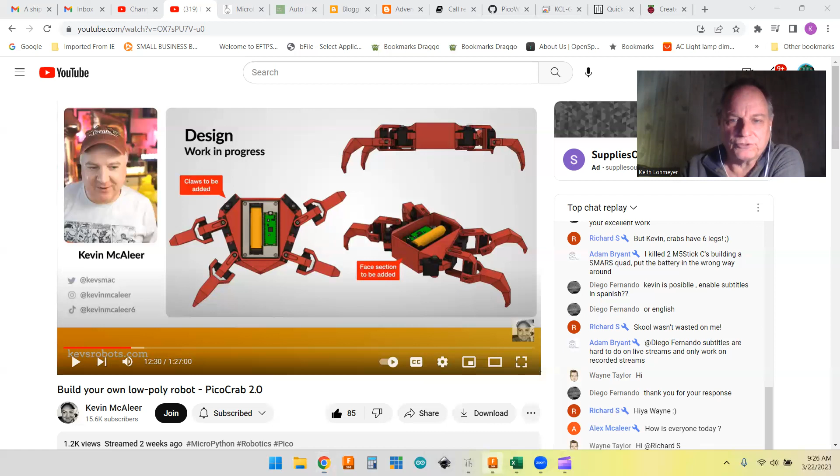Here's the parts that I had: the base, and then this is what I call the hip joint. It's actually flipped up so it goes side to side, and it can be used flipped either way, so there's no rights and lefts on it.

The legs themselves, the way I wanted to put them on there, there's going to be rights and lefts, so I had to make a mirrored image of that. The cool thing is in Fusion, you don't have to redraw it.

You just create an offset plane here and then use the mirror feature, and you can mirror the whole body and it comes through. That's a cool tip for anyone using Fusion 360, that you can mirror your objects with just a couple clicks.

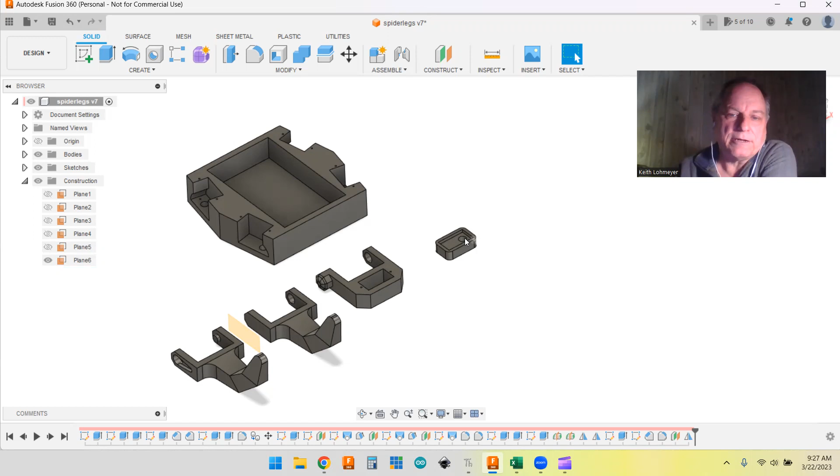Another thing is that most servos have no way to support the bottom of the servo. You're kind of just hanging everything off the servo shaft when you're doing it. I create these caps, I call them, that go on the bottom of the servo, and they have a hole in them. It would actually look like this from the backside.

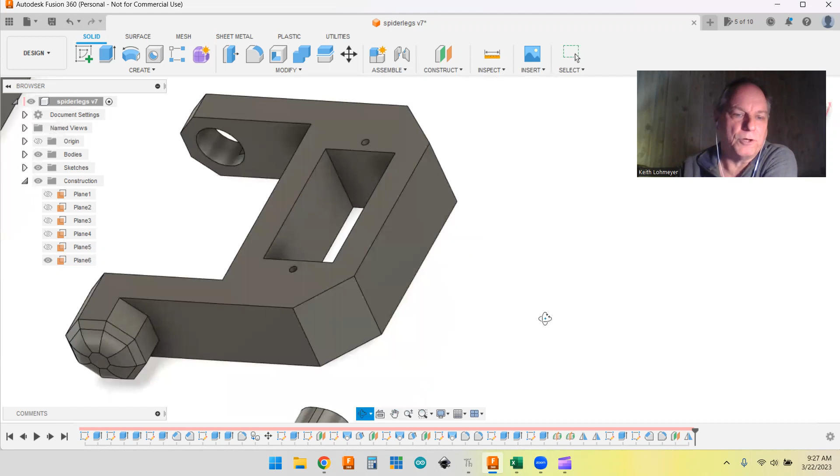That hole actually mates up with this pin on this side. This would be the bottom of the servo, and then the servo top, the shaft goes through there, and then the servo horn on the outside with a screw in it. So that's how I like to support them. It seems to make your servos, even cheap servos, work pretty good that way. Otherwise they get a lot of twisting in them.

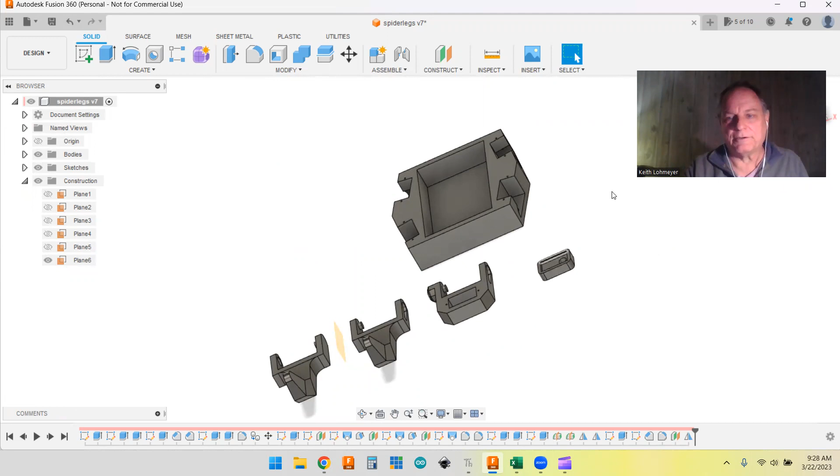So I had time to go ahead and put this together. Like I say, you have to put your servos at 90 degrees, so I wrote a little program to put all the servos at 90 degrees so I knew which way they'd be put on here.

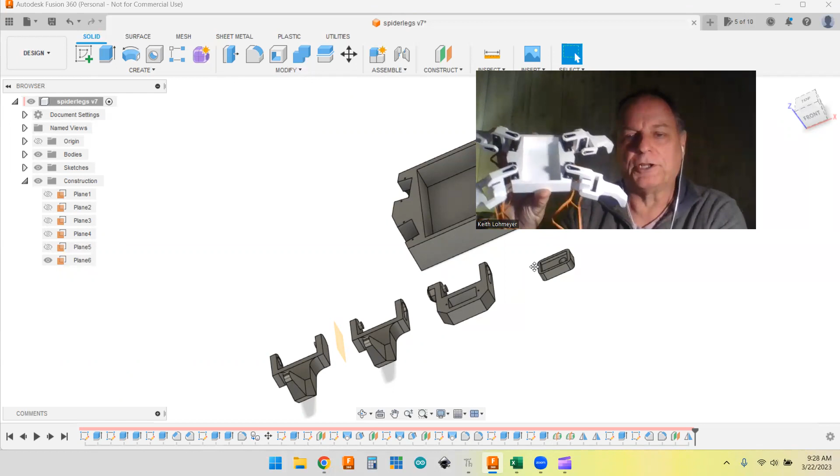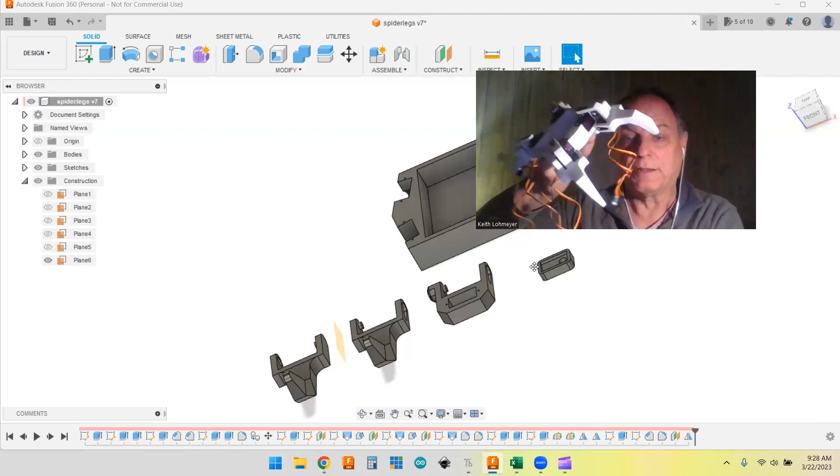This is where that breakout thing comes in, and you can probably see the little cap on the back of the servos, where the hole is. That's a support there, and it makes it pretty good. Plus it kind of centers up the servo when you're doing it that way. You can see that your leg is now servo centered over this part.

So kind of cool. I got that done, and like I say, still waiting on parts. So I decided to start working on the code for it. From my bipedal Bob robot, I knew I wanted to use frames like I used in that.

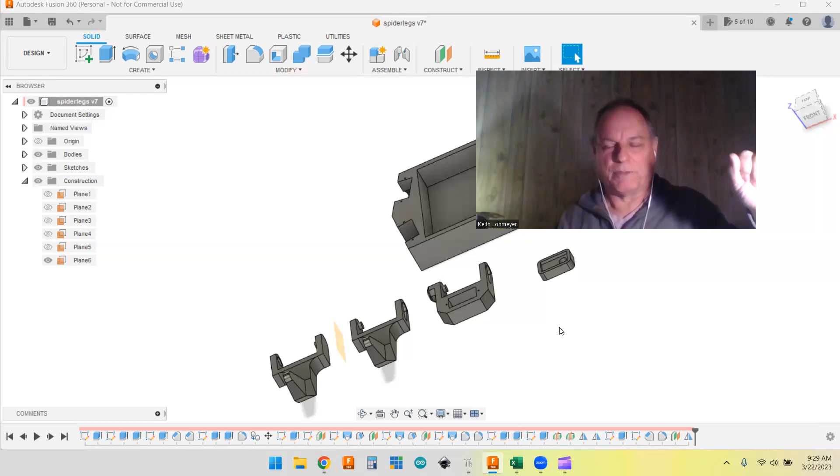It's like stop motion, you know, that every time you make a move, you want to get all 8 servos, or whichever ones you're moving, to a certain position, and then you do the next position. If you do it right, one right after the other, it looks like regular motion, but each frame has its own set of positions that you're going to reach, and then you go to the next one.

So in my last couple videos, I've been playing with a slow servo library, and that's been helping me there. Once I get this project going with the Pico W, I want to probably have a web page with the controls on it.

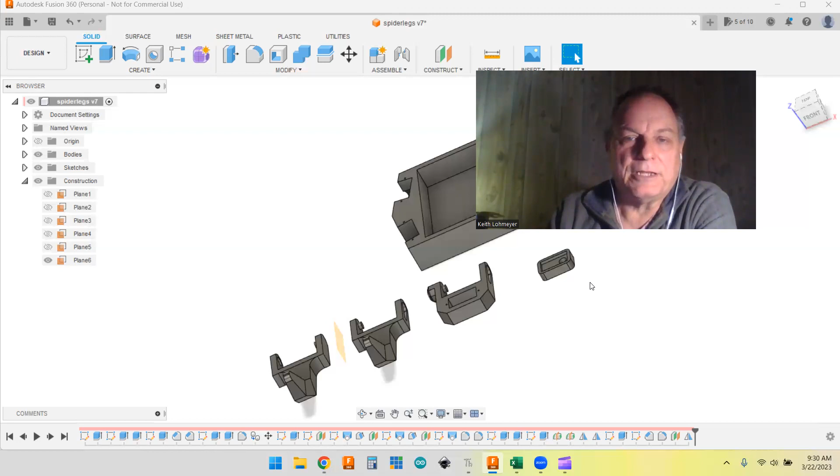I did some work using the Wi-Fi on the Pico W, and I learned a little bit about that. Hopefully my last couple of videos have been a bit of training, getting this working a little bit better. So let me get rid of myself on here, and I'm going to show you. So we got this.

I found this video online that shows a different type of robot, a quad walker, but it's actually got 2 servos per arm. I think it shows what I wanted to show, and we can talk about how our frames go.

So I made an Excel spreadsheet out of this, and I just have all 8 servos, the hip servos and the leg servos, listed.

By watching this video and doing a little thinking, I'm pretty sure that what I want to do, and what they're doing here, is they have really just 3 different positions for the sliding servos. You've got stretched out in front, you've got the mid - we don't have anything stretched out all the way here, I don't think. So we've got a mid position, and then we've got this, which I'm calling the body position. Mid, I'm calling M. And then the other one is when the leg stretches out - you'll see this when we move it, that it goes forward, far forward, and we call that the stretch position.

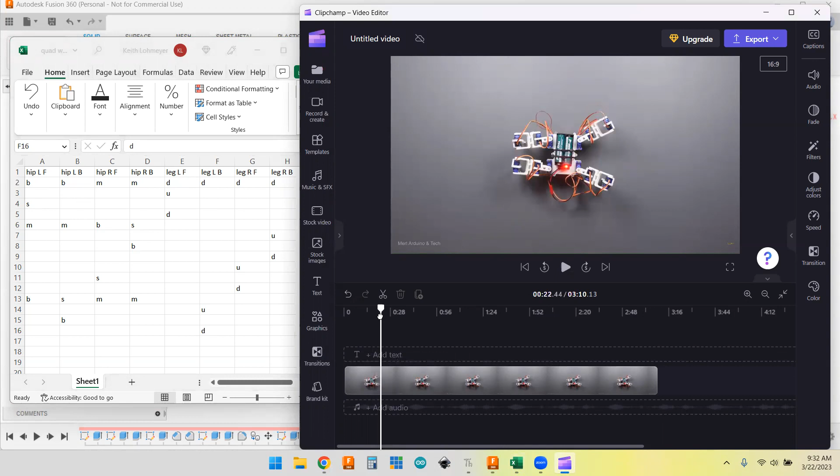So let's just kind of walk up here to the next one. Whoop, too far. There we go - so it picked up its leg.

So the second frame, the only thing we're doing different - we're leaving the rest of the servos alone, but we're picking up the left front leg and moving that leg to what I call the stretch position. It's probably not all the way there yet. And then you're putting your leg back down.

Then you'll see that the next time we move it, all 4 of the hip servos are moving to different positions to pull the whole thing forward. So this part is just moving the leg, and the body's not moving much at all. But then this is what pulls the body forward.

Once that's done, you start on the next part on the right side, lifting the back leg up first and moving it up to the body position, putting it back down. And then without moving the body again, the right front goes from the body position, which will be straight out, and then goes forward.

So let me just go forward here a little bit so we can see what's happening. This is what I have was step 6 on the spreadsheet, and you can see that it's kind of just pulling itself forward.

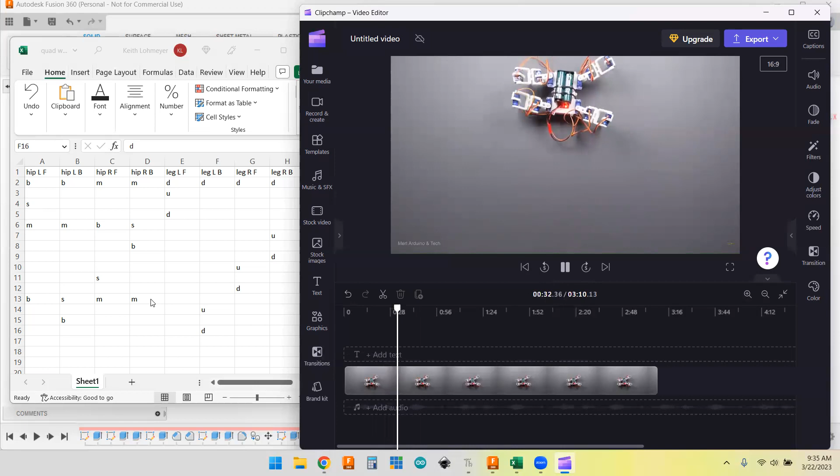But let's back it up a little bit and I'll show you the whole thing playing, and then you can watch what it's doing. So that one goes forward, this one goes forward, this one goes forward, that one goes forward, and it's all kind of moving. Then only twice does it actually pull itself up in the whole thing there.

So that is a video I pulled off the internet. Didn't have any code that I found associated with it, so I just got it for the motions. So the thing is that...

My frames, I'm figuring on a list of strings. So my string will be BB, MM, DD, and then the next string in the list. We don't have anything happening except here, so I'll probably put an N for nothing happening for all the blank spots here - it'd be N, just for this one.

And then once you've got those, you can iterate through the characters in a string just like you can a list. So the string will be easier for me to write - I won't have to put so many commas in. So we'll be iterating over that list, and that'll be for the next video.